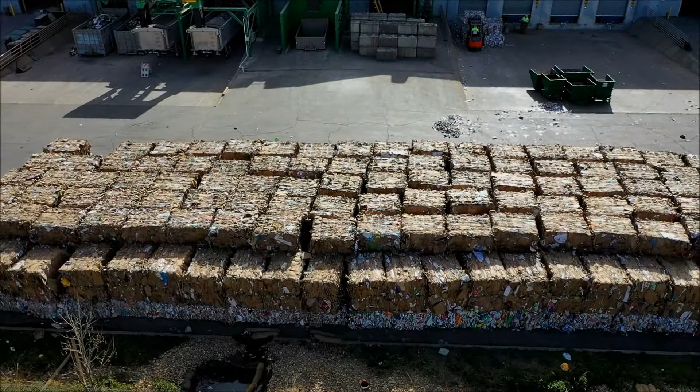Introducing the patented Harris Bale Tie Baler with the pre-compression lid.

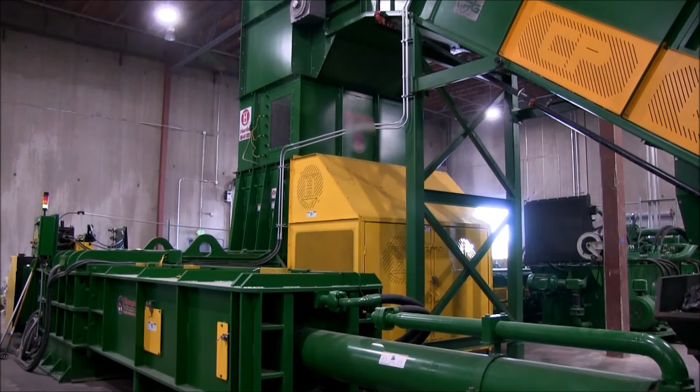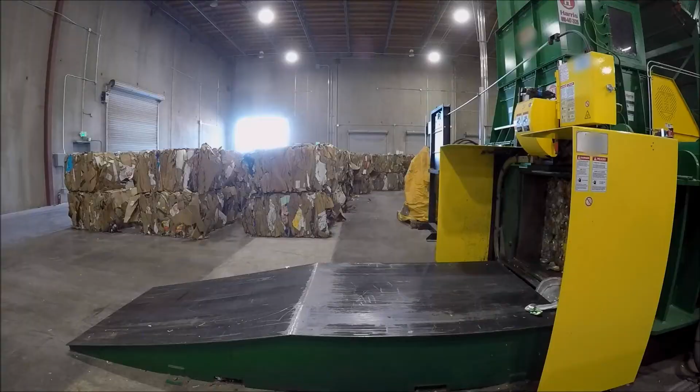Harris's patented bale tie baler has many advantages over a traditional 2-ram baler, making it about 20% faster than a conventional machine. One major benefit is capacity. Because our machine bales and ties at the same time, it is faster and much more productive than a traditional baler. The baling function doesn't stop and wait for the eject ram to push and tie the previous bale; instead, it continues to bale while ejecting and tying off the previous bale.

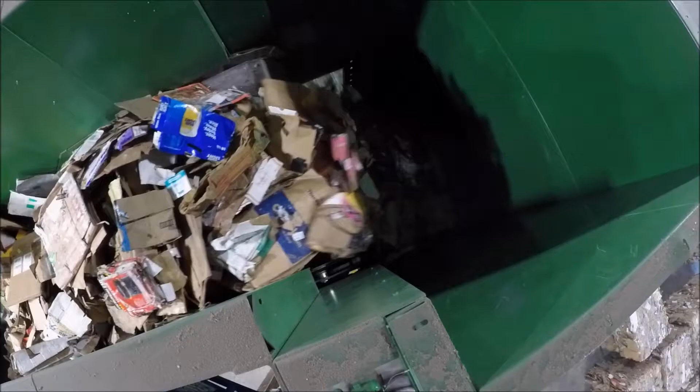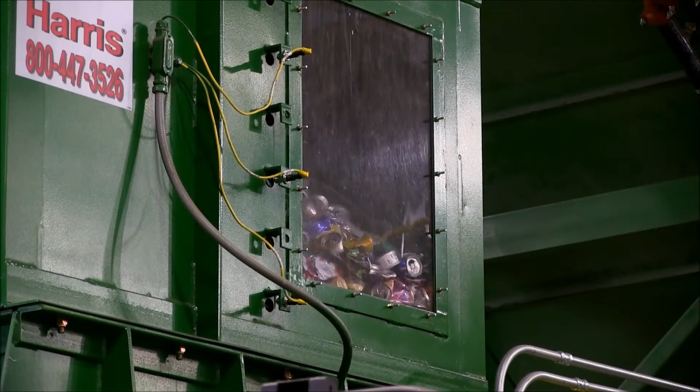Watch the material as the feed conveyor drops it onto the pre-compression lid. Right above the lid is a chamber where the photoelectric eyes are located. These eyes recognize when the material has built up to the desired level, at which point the conveyor turns off and the lid opens. When the lid closes again, the conveyor turns back on to pre-fill for the next stroke.

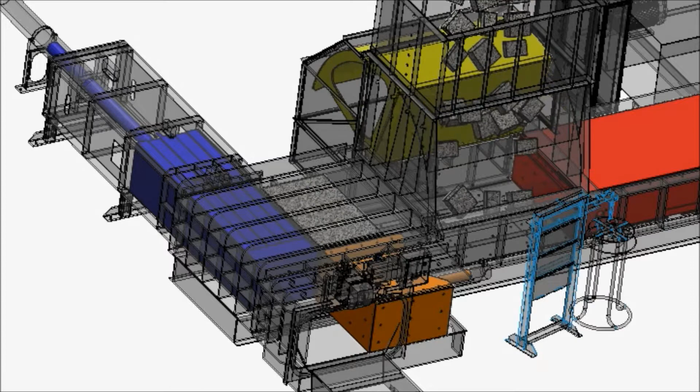The gathering ram comes forward to compact the material against the ejector. When the ejector is in the home position, the gathering ram pushes the material up against the ejector ram into the bale-making chamber. It repeats this process depending on how many strokes it takes to build a bale based on dimension and pressure.

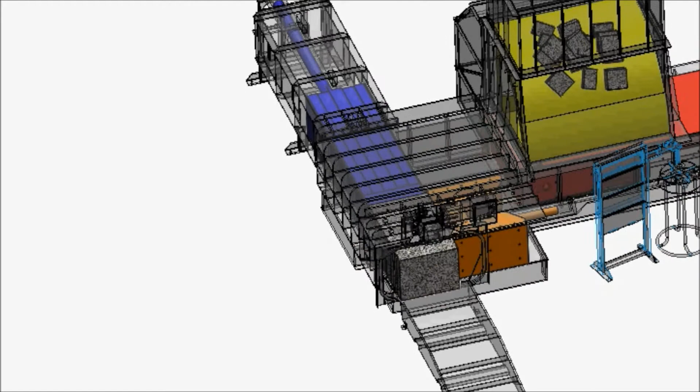When the bale is complete, the gathering ram stops, the ejector ram backs up to its full rear position, and the gathering ram pushes the bale into the bale chamber. Then the door opens and the ejector begins pushing the bale forward to its home position. At that time, the main gathering ram retracts, and the machine immediately begins making the next bale.

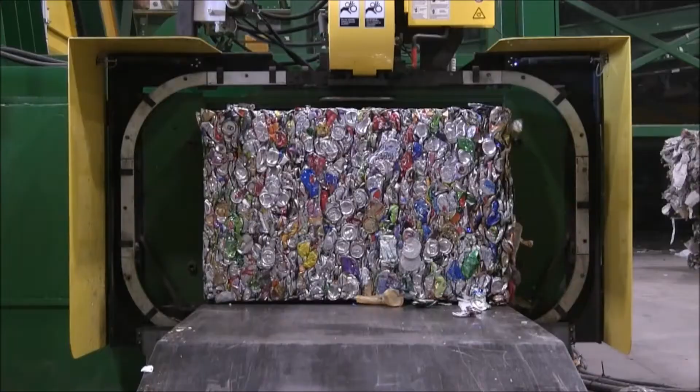As the next bale is being made, the ejector ejects and straps the first bale. When the first bale is complete, the ejector ram retracts to its home position, and the bale door closes while the next bale is being made. If the next bale is already complete, the whole process starts over.

The baler operates automatically and continuously. You can choose up to 20 different materials with saved settings for each material.

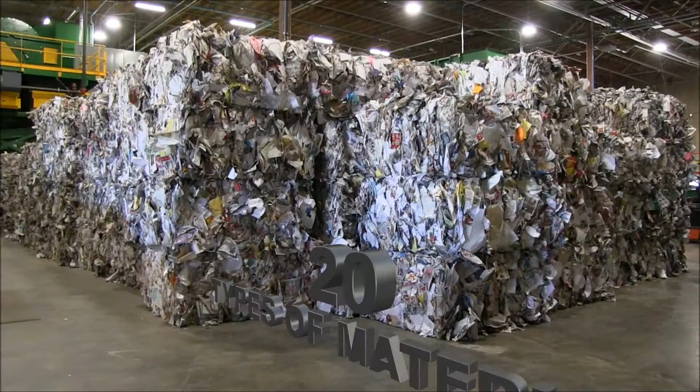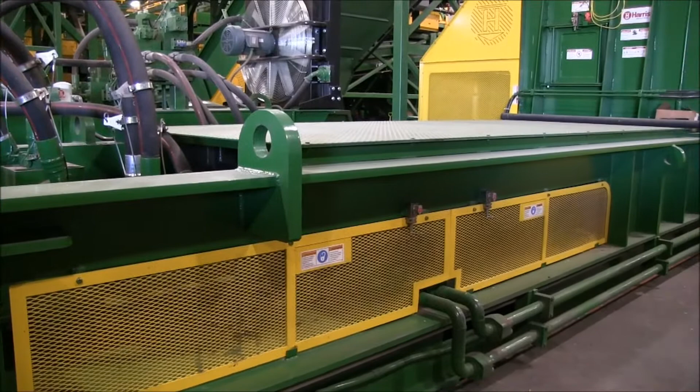Other major benefits are the 60-inch wide opening, the 200 horsepower high-speed power unit, and the 13-inch main cylinder size for bale weight and throughput. Harris uses the latest in technology and software to run the baler.

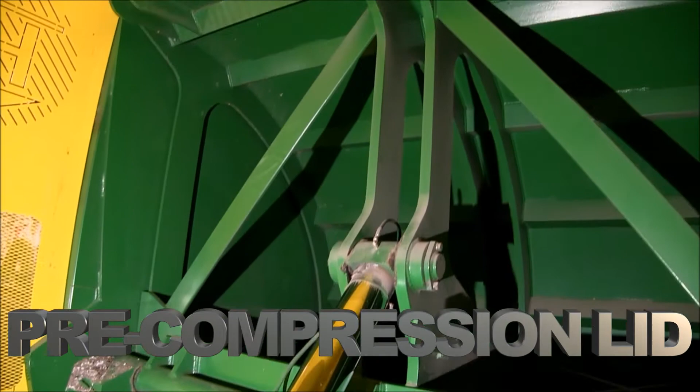Another major feature that sets Harris apart is the pre-compression lid. Notice the lid opening and closing in 6 to 8 seconds. The baler continues to strap the bale even with the pre-compression lid operating at the same time.

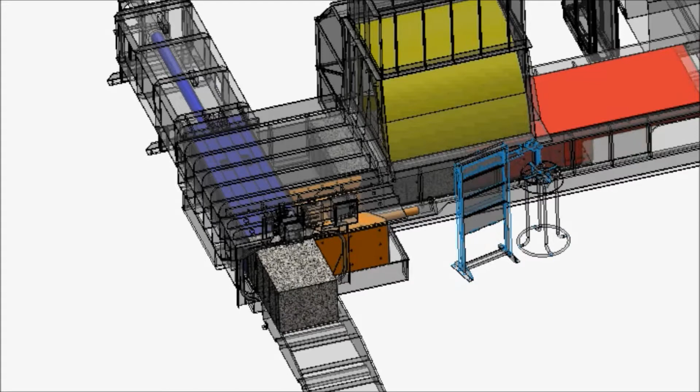On traditional machines, every time the gathering ram moves forward while baling lightweight containers such as HDPE, PET, and UBC, the material pops up because of how light and loose the containers are. With our pre-compression lid, the material is kept in place, so you make a bale of light material in just 3 to 4 strokes. A traditional 2-ram baler takes 15 to 18 strokes to make that same weight and size bale. Because the Harris Bale Tie baler does the same amount of work but much faster, there is significant energy savings as well.

The bale tie with pre-compression lid is a no-shear baler, which means less wear and tear on the liners. They last longer because it's not shearing and damaging itself. All material is held down below the shear blades.

With traditional 2-ram balers without the pre-compression lid, there is a shearing action going on. Imagine the force required to cut or shear large volumes of cardboard or paper being pushed against a blade trying to cut through 20 to 30 inches of cardboard. In total, this would basically be like cutting through a tree trunk. That shearing action causes excessive wear on the floor.

The liners in a Harris Bale Tie lid baler last up to twice as long as liners in a conventional 2-ram baler. With the lid balers, we have noted upwards of 18,000 to 22,000 hours and longer before a reline is required.

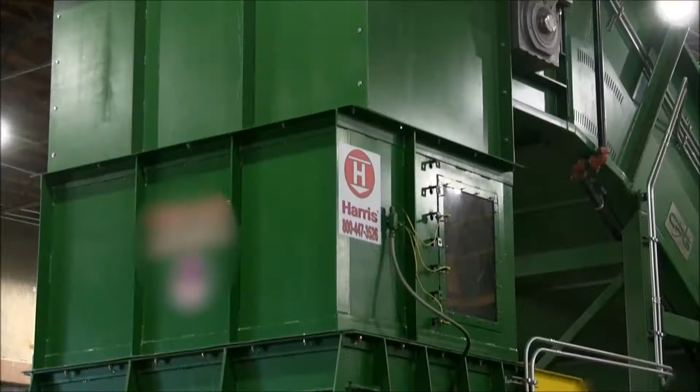With a pre-compression lid, the gathering ram just goes back and forth, and there's no gouging. The liners, pumps, and valves last a lot longer because they're not being taxed by that sudden hydraulic shock from shearing. When a standard shear baler finally cuts through material, you can hear it—it's loud and vibrates everything.

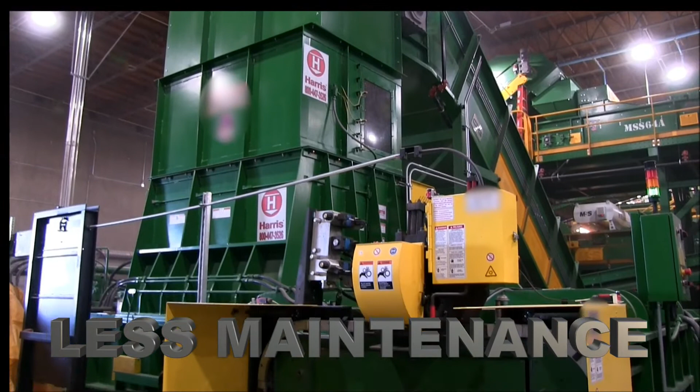There's less maintenance required on the Harris lid baler since they don't experience the shock of shearing every stroke. There are companies that won't have anything but our lid system, simply because of all the features we've just talked about. As of 2019, we have over 300 of these balers across the nation.

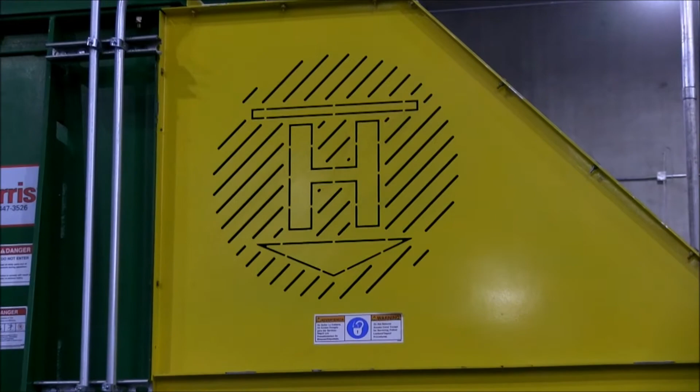This baler has been in production for 25 years, so you can rest assured that it's a well-built, durable, and very efficient piece of equipment.